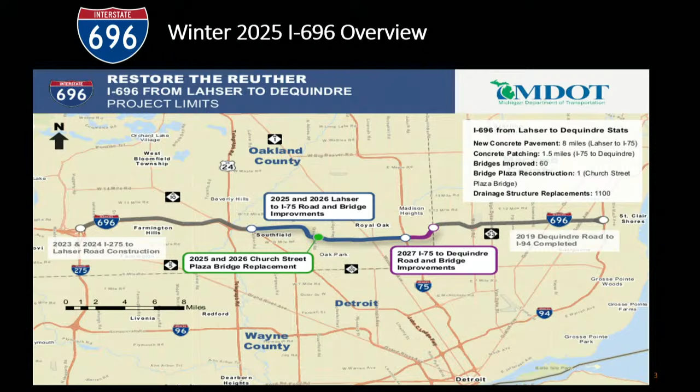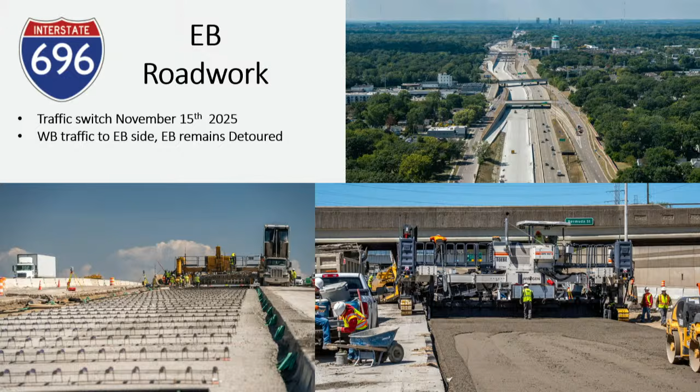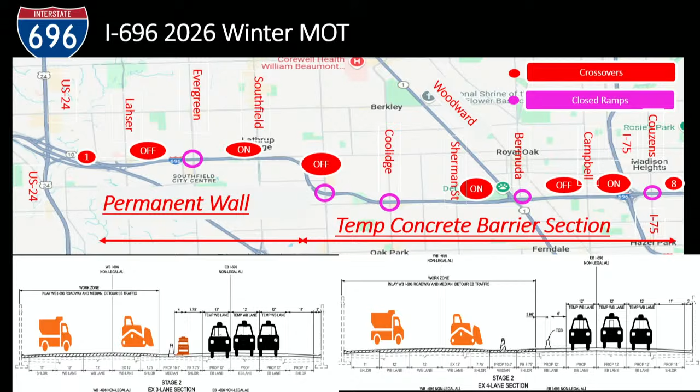Isn't Southfield open? Yes, in Southfield, on and off ramps are available. So the primary ramps Oak Park will use will primarily be the Woodward on and off ramps to and from westbound, and then also the Southfield ramps. And this will be for a year. Yes.

Let's see, that's kind of stretching out.

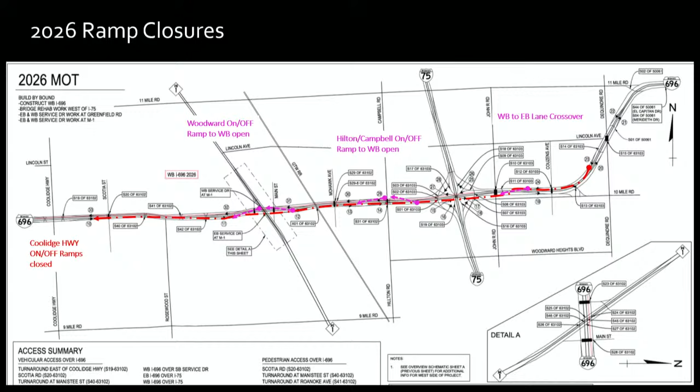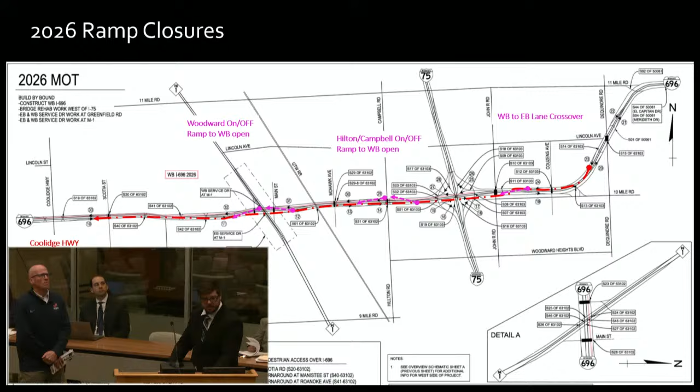This shows in the red dot line here where your crossover for westbound traffic is. It essentially shows the path of going westbound off 696 and how you transfer over to the eastbound lanes, going the opposite direction. We've got enough signage, reflectors, and positive protection, so it really shouldn't feel like you're on the opposite side of the road.

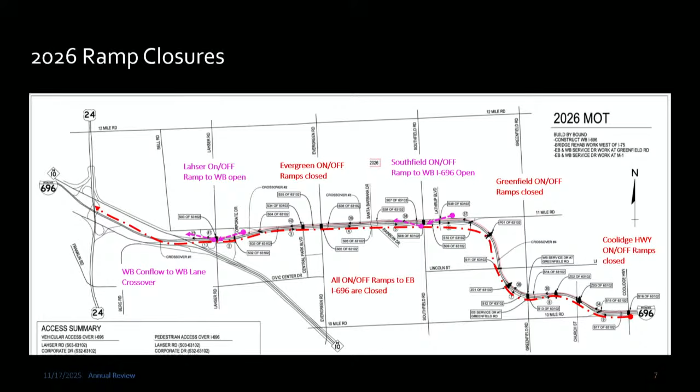Here is your primary detour if you are going eastbound. That direction is still detoured for all of next year. So your normal detour that you were taking before going eastbound is still getting on M10 and then getting onto Telegraph. That will remain exactly the same.

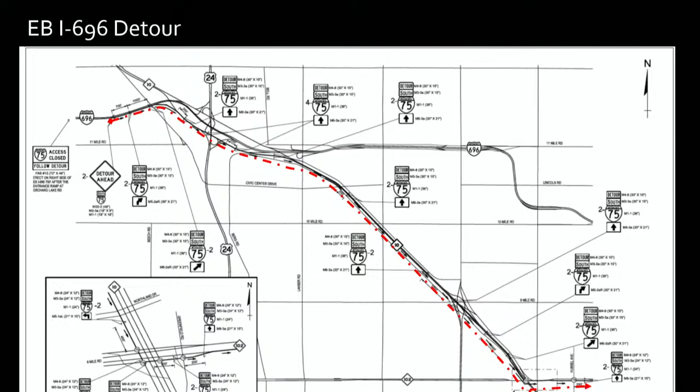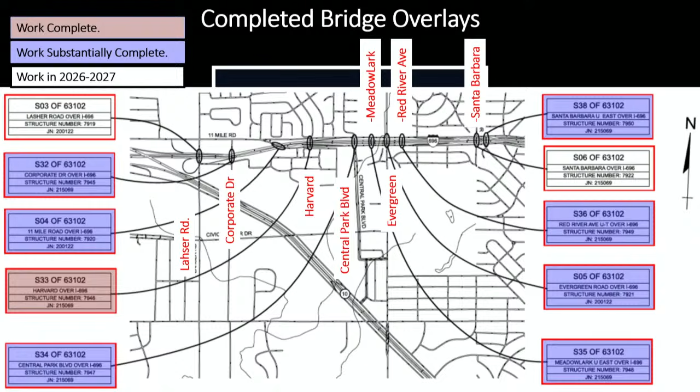This just describes all the bridges we've completed. There are several crossover bridges, roughly from Lahser to Southfield. A majority of these crossover bridges that everyone uses to go to and from your neighborhoods to the service drives have been completed. And from Southfield to Woodward, again, about half those bridges are completed.

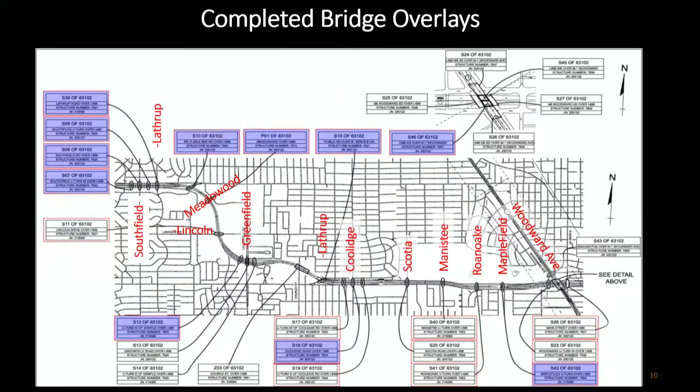What about Church Street? Let me get that, I've got a closer view. Here we go. So this is Church Street, or Victoria Park.

We are now in the reconstruction phase. We completed the demo phase of taking down this plaza bridge entirely this year, and now we've moved over to getting ready to reconstruct the westbound side of this bridge by installing beams later this winter. You'll see this be reconstructed throughout 2026, and again, it should open up late fall 2026.

That will have the road portion to the left that you can see, and the new park. The same pedestrian detour is going to remain the same all throughout next year, so nothing will change there.

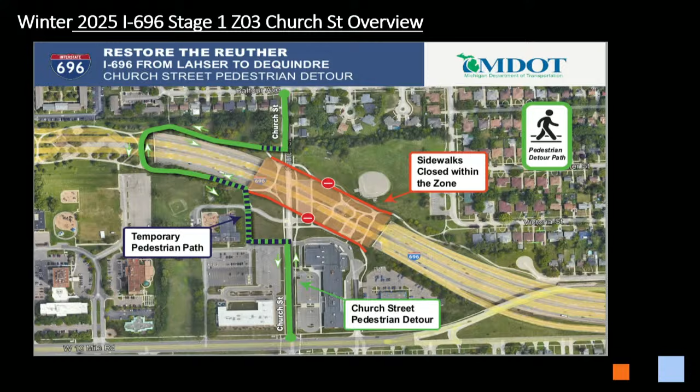You said the new park would be finished by 26? Late 2026, we should have a majority of that park finished, with the first couple of months of 2027 as a possible time to finish every piece of the park if needed.

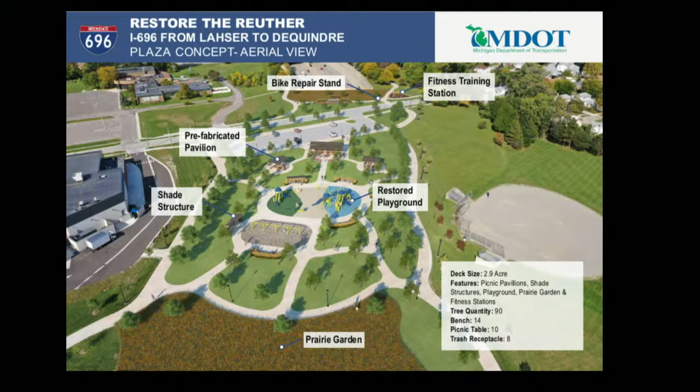This is a rendering of what it would look like. Looks fairly similar. I like the pergolas myself, gives you guys more shade when you're watching the grandkids.

This is just a quick look at the new beams coming in. It's a brand new design, no more icicle leaking possible at all. Basically, it forces all water into giant collections under drain and shoots it off to the service drives.

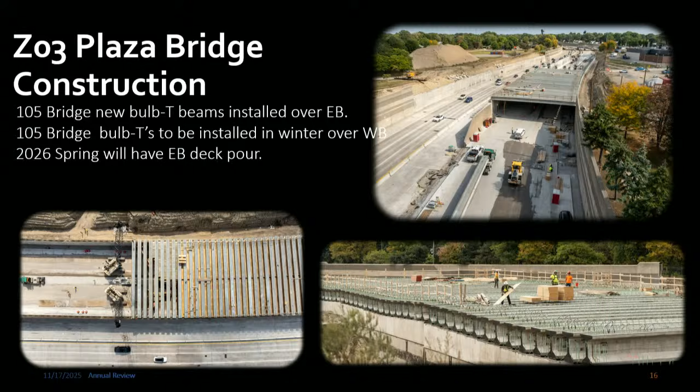Same day we get emails back, phone calls back. We want to know if the public sees something that doesn't seem right, or has just a general question on when a bridge is going to be completed. Mostly all these bridges are supposed to be completed within anywhere from 30 to 60 days. So if you have a question on when a bridge or maybe a sidewalk is going to be opened up, that you might use to get your bike around the city, we can answer that the same day that you contact us.

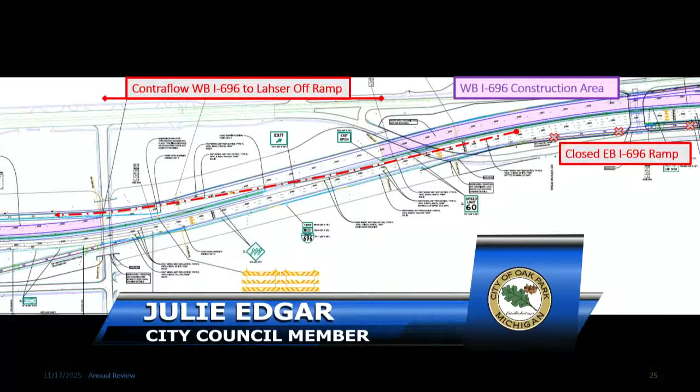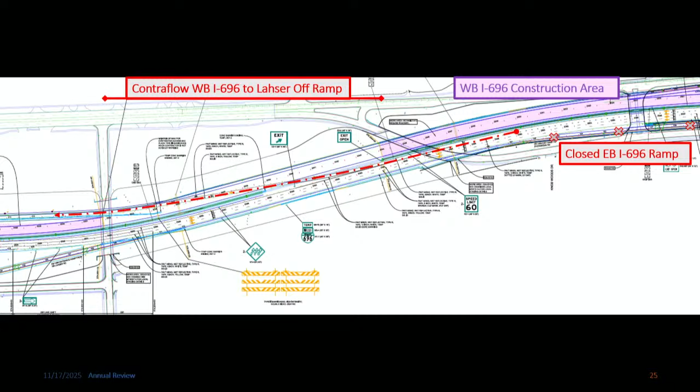That's a bummer. Yeah, MDOT recognizes this as an extremely painful project for the communities and cities. We understand. That's why we're trying to get the most value out of state of Michigan tax dollars by doing an overlay, giving the communities a 30-year lifespan on this highway, so we don't have to come back and do this painful work for another 30 years.

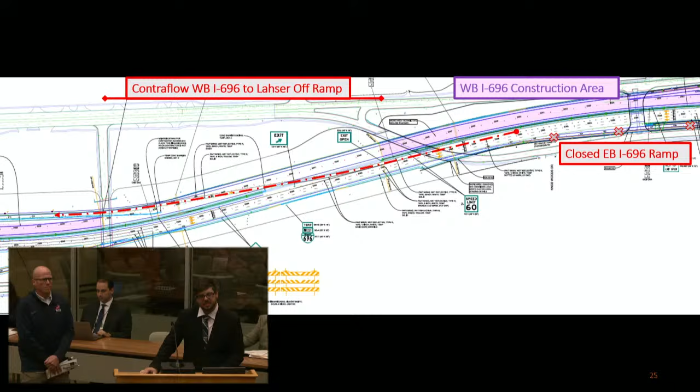Hopefully everyone's retired and doesn't have to deal with this. We understand these are very painful projects, and we're receptive to phone calls and emails, trying to reach out to cities to get you the most up-to-date information on bridge closures, openings, and even how residents get out of their neighborhood. We'll try to answer any question to the best of our ability and work with citizens and cities to make this at least a little less painful. It's painful for our businesses too, since both city ramps are closed at the same time.

Madam Mayor, just a question, mainly about aesthetics. I noticed on the service drive, the 10-mile service drive, they're redoing some brickwork on the barrier wall that extends west of Church Street, and there have been missing bricks for a very long time. I understand the city has contacted MDOT about replacing these bricks, but it's unsightly, and that's a park. Are you going to fix that while you're doing the rest of the work?

Yep, those sound walls with the brickwork that's damaged, and limestone caps that are damaged or sometimes even missing, have been packaged into this project. I think there's 6 areas of those sound walls to be repaired, bricks put back in place that match color as close as we can, and the limestone caps replaced where they're damaged. That is included in the project, and it will be worked on primarily in late 2026 and into 2027.

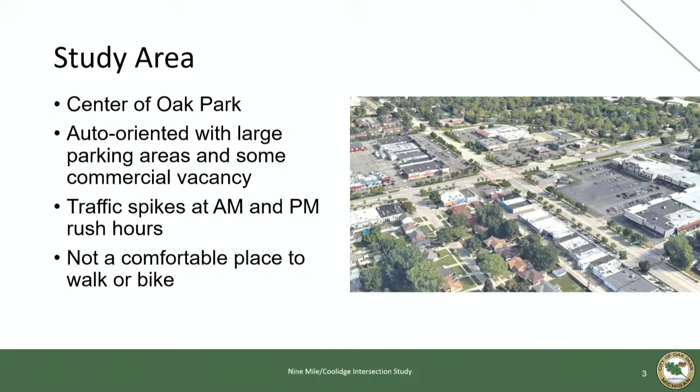You've been there before. It's fairly auto-oriented. There's lots of parking, there's some traffic spikes in the AM and PM, and generally it's not a place that people really want to go walk and bike and have that urban feel. You look just a couple blocks down to the east, and it's walkable, and there's the great linear park, and there's lots of local businesses, but you sort of lose that as you get close to the intersection.

So we started with very technical analysis, looking at all the existing conditions, including a traffic analysis. The traffic study was really to understand what could we do here—can we narrow the roadway and still have a functional roadway?

So we used data from spring of 2025. This includes some of the traffic constraints that have happened since the closure of 696. Even with that increased diverted traffic demand, we found with a couple of small alterations of having a road diet, if you want to go down that road, it wouldn't significantly impact operations.

We'd have to do a little—I have just a question. Sure. The traffic study was conducted while 696 is closed for repairs. Yes. Putting more traffic on our mile roads, does that skew the results at all? It skews it towards, I guess, there's more traffic currently.

And that was something that we did take into account, but we still did the analysis with those numbers from spring of 2025, and it's right on the edge. Knowing that those numbers are going to go back down in 2 years, we think you can make a road diet work if you really wanted to.

The only thing that we would have to do is keep right turn lanes from 9 Mile onto Coolidge. That is the movement—if you're coming eastbound turning north, going westbound turning north, coming eastbound turning south. Those were needed; those are the big movements that people are taking. They're usually going north up to 696 or other places in northern Oakland County.

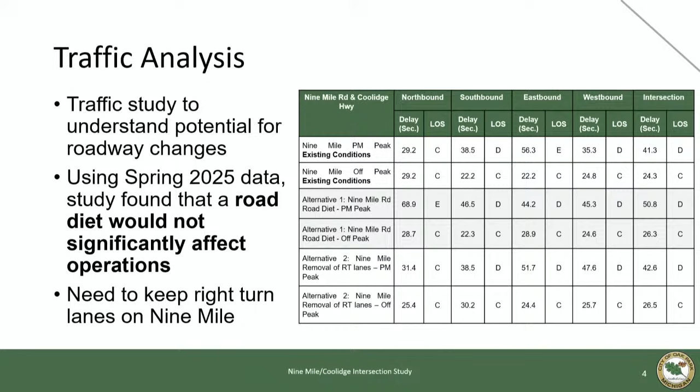Kim and Eric have a copy of this. And what we ultimately came up with was essentially a 3-lane cross section through the intersection. It keeps the same kind of profile as what you see to the east of the intersection.

Most importantly, it gives us enough space to add a 12-foot shared use pathway on the north side of the street. So it would continue where the trailhead is through the intersection, and on the next slide I'll show you where it terminates, and then you could have a similar treatment to what's on 9 Mile east of the area with the cycle track on the south side.

We looked at the Granzon, McClellan and Dante Streets, sort of formalizing those as real roads rather than—there's one that's kind of a real road, but the other two are sort of alleyways or parking lots—as backup release valves that help take some of the traffic off of the intersection. So they would then be turned back into real roads? Yeah, yeah. I'll show more of that in a second here.

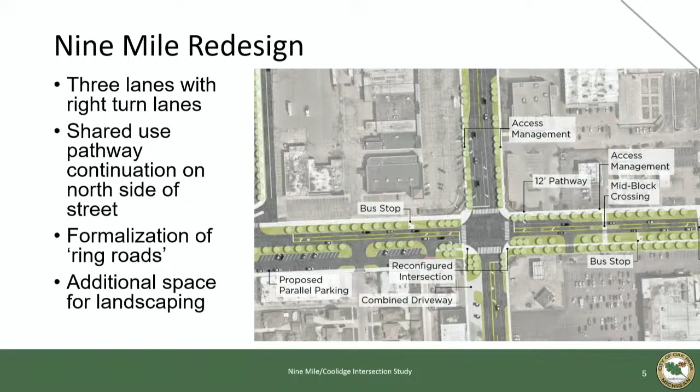And then again, additional space for landscaping and greening the street up and making more space for people to feel comfortable walking and biking. And what's even more exciting is when you tie that with some of the development ideas.

A little bit further view out of what the study area looks like. There's connections to a future bike lane, connections to the existing cycle track. The two red circles show the transition period from the existing bike lane and cycle track on the right side. We thought you can continue that same kind of pathway or roadway treatment on the west side as you get out of this really constrained area. You can see there's some formalization of those roads that kind of go around the development.

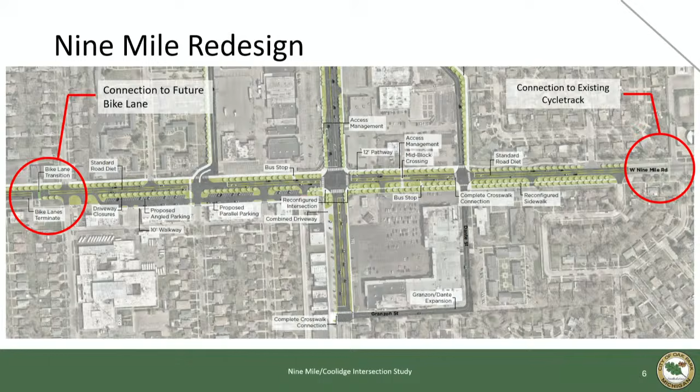So after we had come up with a concept for the roadway, the idea was to think about how those three quadrants there, the northwest, the northeast, and the southeast, start to be reimagined into something that's a little bit more modern and exciting. So this is a plan view shot, overhead shot of what this could look like.

Really, we wanted to go at this with a mix of uses. The purple buildings are mixed use, with a mix of residential, some office potentially, and commercial space, both retail and restaurant. So first floor restaurants and businesses, second floor residents. These are really targeted towards the busier parts of the intersection where there's lots more potential for foot traffic and views. There's parking inside the buildings themselves, and those gray boxes are parking decks.

The brownish, orangish color are just multifamily units, apartment buildings. Those also have parking inside of them on the first floor. And then the yellow buildings are townhouses.

So what we've done is tried to balance this. Everything that you see here is to the zoning code. It meets the parking requirements established in this area. We started with parking and said, we know we need to hold vehicles. We don't want it to be the driving force of this area, but it's part of the deal. We've got to have some places to park cars. And really what we're showing here is the highest intensity use that you could do, based on the code, based on what you can do legally.

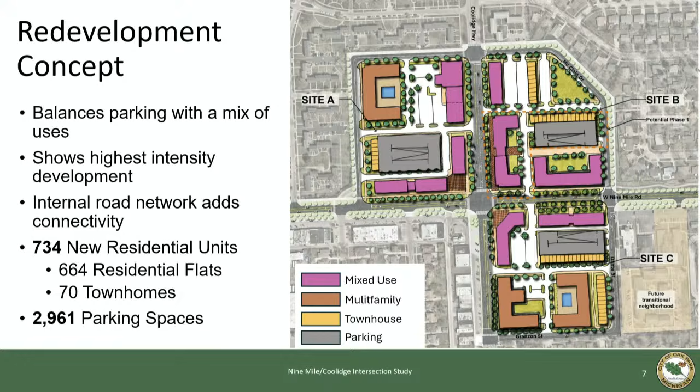Those turquoise blue areas are pools for the residents. The blue on this image is potentially office space, if there's demand for office. The floor plate of these buildings is the same as a residential building. We've seen some developers dipping their toe into that kind of small office space, where you may have a law firm or an accounting firm, something that doesn't have a ton of need for space but wants to take up the corner of a building like this. But if there's no demand for it, it could very easily just be apartments.

So it's very flexible, what we're showing here. Really, this is to get developers and property owners excited. The next steps are to start down this road if you like the idea of a road diet or some improvements to 9 Mile, studying this further and coming up with a detailed design. This is fairly conceptual. It's based in fact, based in what we studied, but there was one engineer on the team, and this is a little bit more creative than what you'd see from a detailed drawing.

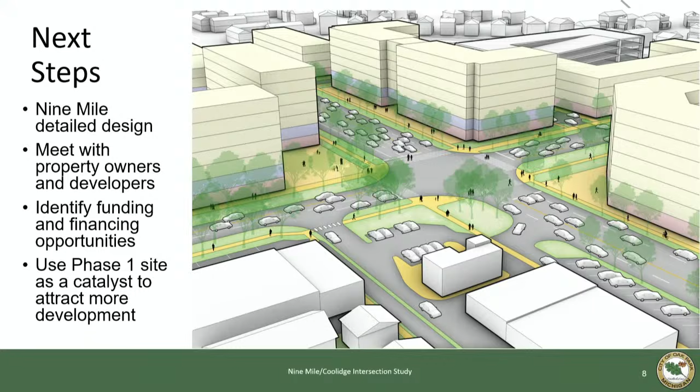Council members, I believe in your package you have the full report. Yes, but I wanted to bring your attention to page 83, which is the beginning of... I don't know if I'm skipping you ahead here by doing this. No, go for it. It's the beginning of the implementation section of the report. Is it 83? Page 83 of the report. Yeah, it might be page 58 too. It's 83 of the... I'm sorry, page 58 of the report.

Right there, there you go. Implementation. So it gives us some guideposts to look at in terms of the next steps to take to bring this to reality. Part of that is there's properties, like the Walgreens property, sitting vacant. There are some prime opportunities for us to go out and seek development that would meet some of the new requirements, let's call it. Could you briefly speak to the steps in this implementation?

Yeah, because this is kind of a multi-pronged approach. We've got a streetscape and infrastructure project with the 9 Mile improvements, and then we've got private development that could follow, maybe comes at the same time. What we've seen really successful in other communities is using an infrastructure project, a streetscape project, to spur on private development. We've done that on 9 Mile Road, the award-winning 9 Mile Road redo.

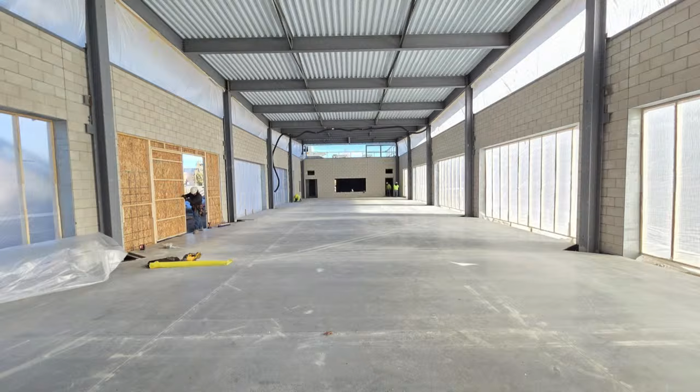You may have noticed we're adding a drive over at the library, which I believe is being poured today, allowing patrons to come in and out of the library parking lot much easier. Also, the floor for the Event Hub space itself has now been poured inside, and I think they're going to pour the band shell floor this week. The internal work—they've got the buildings partitioned off now—will begin in earnest over the course of the winter. I have no reason to believe this project isn't going to be built on time and under or within budget.

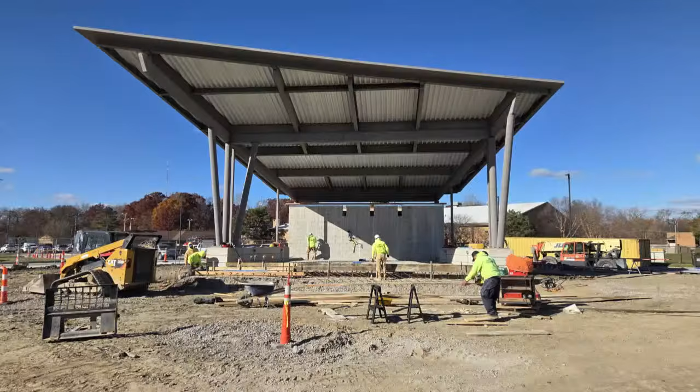Any things you want to add, Dave? I did—Mayor and Council, your packet has some pictures, but those are about two weeks old since they're from end of month. I provided Benny with some updated pictures from today and this week. Can you go back to the one with the floor? Go back one to the city manager's comment—there we go.

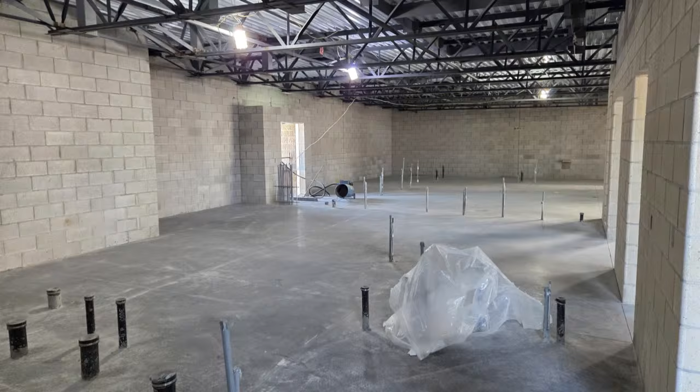The floor is now poured in the Event Hub area. You can see the carpenters have visqueened and put plastic off the big garage door openings. That wood is an opening for construction crews to enter and exit because the building will be heated throughout the winter. The far end is the commercial kitchen. As you get closer, those plumbing fixtures coming out of the ground are for the restrooms. So all the underground mechanicals are now installed—electrical, mechanical, plumbing—again this is the Event Hub area.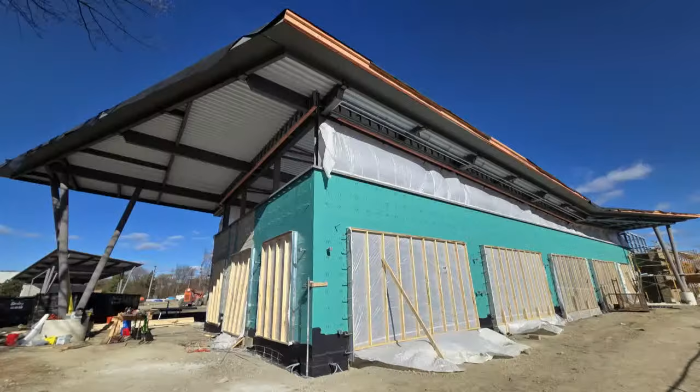I think there's a couple other pictures here as well. This is the exterior—they're working on the air barrier and the masonry work. You'll see the soffits being built underneath the canopy. I believe the next picture is the far corner of the commercial kitchen where the block is now up. So all those areas you just saw in that last picture.

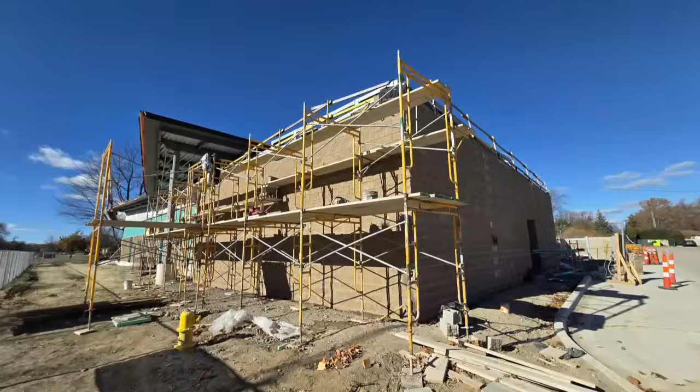Curious, what's the blue color and the other color? It's a vapor barrier between the block and the veneer block—they put insulation there and it's like a vapor water barrier. So it's not paper, it's designed that way. The bottom black is waterproofing. All those areas there with the plastic are garage doors that will open up for events and things we have. The last picture is some of the block being installed on the commercial kitchen.

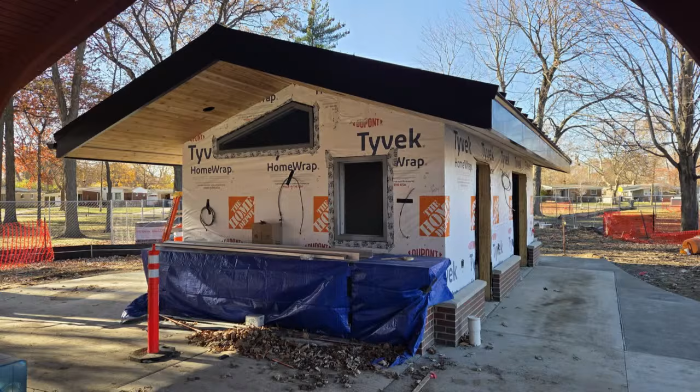Yeah, there's some of the split face block being installed, and that's in the front—the final facade brick. That there is the final facade block, correct? Yeah, yep, it looks great.

I also gave—I don't know if the city manager wants to set this up—I provided some pictures for Oak Park Woods as well. Oh good, I can go over those if you'd like. Please. Okay, so this is the warming kitchen and storage room on the now west side of the shelter.

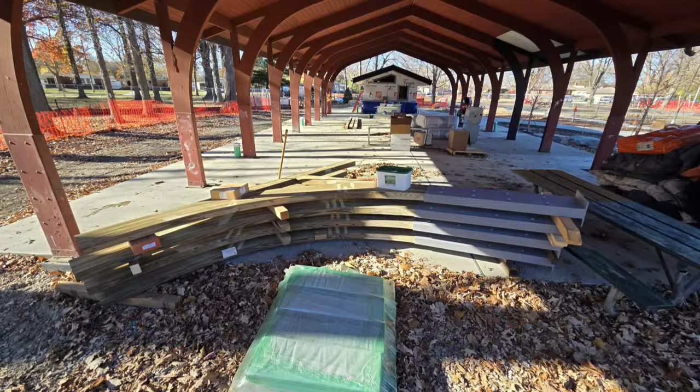You'll see a little window there and a small countertop. Inside that first room is a new and improved warming kitchen. We'll have some light amenities, and it will allow people who rent the pavilion to warm up their food and things like that. The whole back area is storage, about 15 times bigger than it was before. This is under the pavilion—you'll see some new wood framing they're going to install. The concrete has been poured under the existing pavilion, so that work will be continuing.

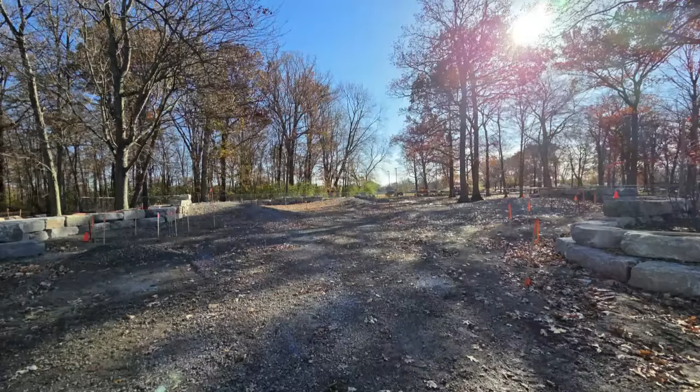This area is the main part where the play structures are. There are a couple million dollars worth of play structures going to be installed in this area.

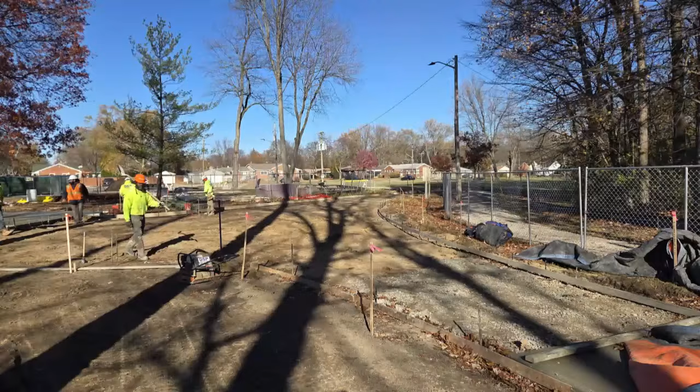This will, for the most part, all be a poured-in-place, safe, accessible surface that kids will be able to play on. You can see some of the hills there, especially on the left and right side. There are fabulous elevation changes that kids can roll up and down, and some rope climbs and things.

This is some of the area they're paving. As you come from Shelter 2, you can kind of see the forms. This is some of the new concrete sidewalk they're getting ready to pour. It may be poured by now since this picture was from last week, but that whole area is all sidewalk as it comes together near the shelter and wraps around the park.

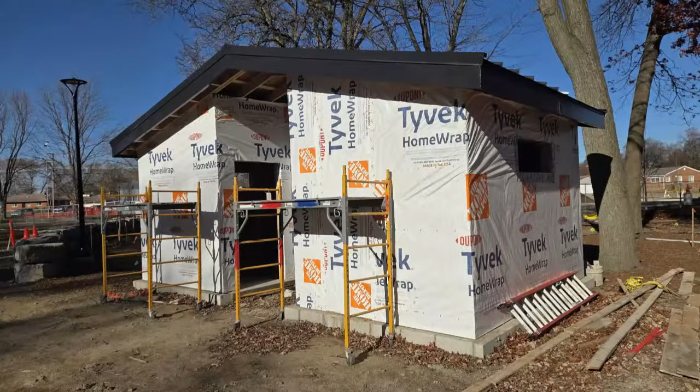And I think that's the new bathroom. Originally, they were going to go with a precast bathroom like we did a couple years ago, but lead times were extended, so they decided to stick build it as traditional wood construction. It's nice to have the bathroom and the kitchen separated.

So the streetlights - there are 3 new decorative streetlights in the park. Those were delivered and installed last week. You can see some of the landscape blocks there and our new street lighting. That street lighting is the same as on 9 Mile, and the same as the 9 lights we have at the event hub. Very stylish and effective.

Council members, I won't give any other updates on that - we've talked about the community center already a little bit this evening. Dave, great job on all the projects you work on for us. I'm so excited about where we're going here as a city, so I'll take any questions, and if not, that completes the city manager report for this evening. Any questions for the city manager?

No. Call to the audience. Do you want to read them?